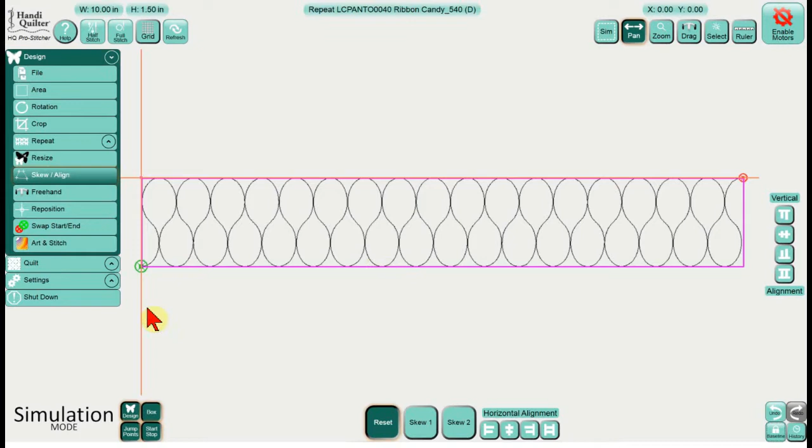So here's what I sent you, but you said you wanted more loops in the area, so let's just start from scratch. Let's close this file, nope I won't save that one, and I'll clear the area. Let me show you how I started. Here's just a pattern that I have. I'm not sure if it's exactly the same one that you had.

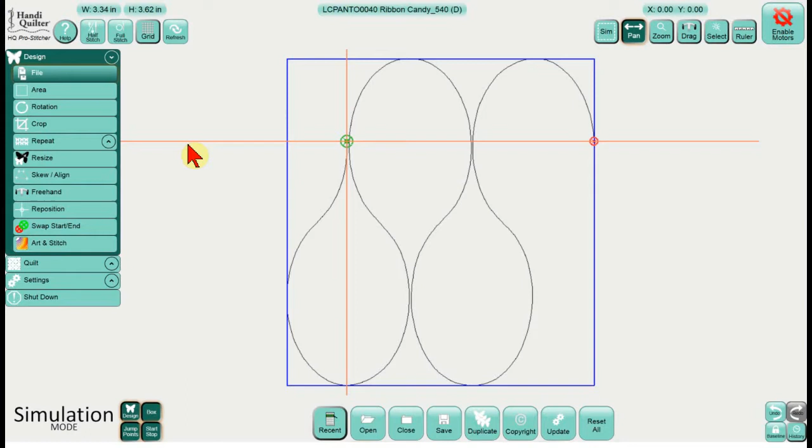The first thing I always do when I start is I want to create for myself a master in the size that I want, and then I'm going to skew it later at the quilt. You said you wanted this 1.5 inches tall, I believe it was, so I'm just going to resize it.

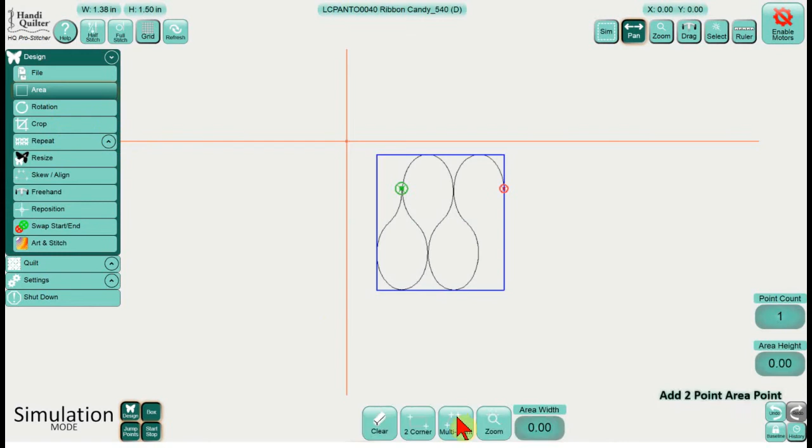Then you said you wanted it about 10 inches. The sash was 10 inches, but you wanted 20 of those loops to fit inside. So I'm just going to create an area, and I'll make it 10 by 1.5 inches tall.

Then I'm going to let Pro Stitcher do the work. I'm going to do repeat and fit to area, and I'm going to put it on point to point and refresh so that I can see. Now I'm just going to start repeating manually down here, and I'm going to depress my stretch to width button, and that's going to fit what I'm repeating inside of that area.

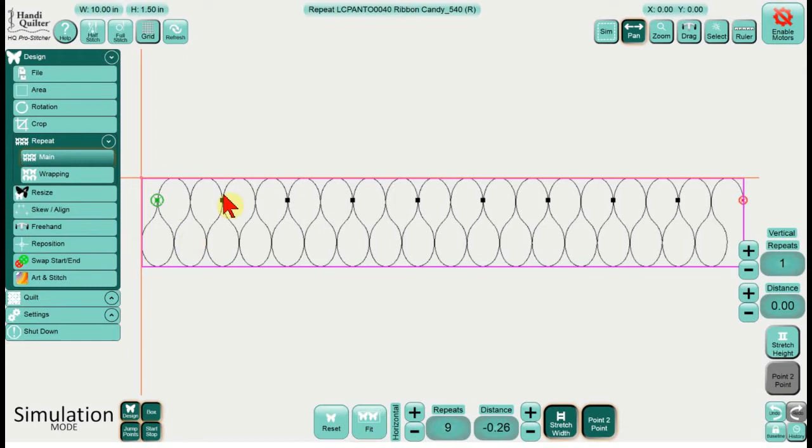Okay, we have 1 through 17. How about we put a couple more, or maybe even 3 more into that space? All right, that looks pretty good to me.

Now, the only thing I don't like, obviously, is the start and stop points in here. We're going to take care of that in a minute. And I also don't like how we have a little bit of unquilted space here and a little bit of unquilted space on the other side.

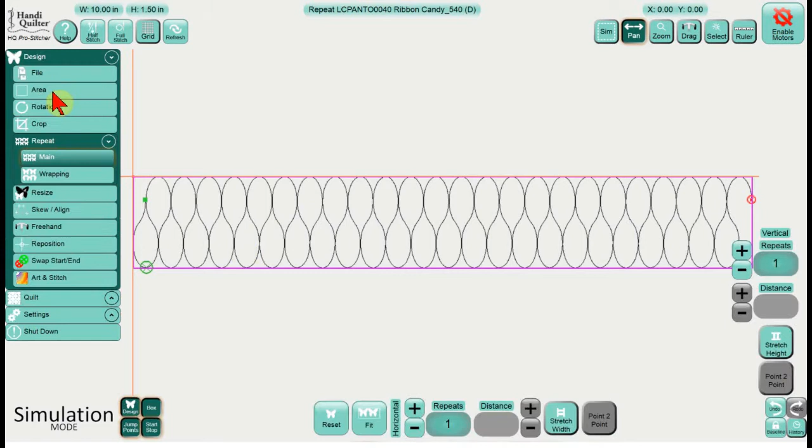So what I'm going to do is baseline, and then change my start and stop point by doing quilt, new start. I'm going to take that start point and advance it down until it's kind of on the bottom there. That looks good to me, and then I'll do a crop, start and end, and then baseline.

I'm going to do that with the other end too, with the stop point. So I'll go into quilt, new start and end, and move that end point until it's more towards the top there. Whoops, went a little too far. All right, and then I'm going to do the design, crop, start and end. Now that looks better to me as far as where the pattern's going to start and stop.

I'm going to go back to my align function. Once again, I'm going to depress my stretch. Now I see that I have a pattern that's 1.5 by 10, and I've got 23 loops. So I went a little bit further than you wanted, but if that looks good to me, what I would do is baseline.

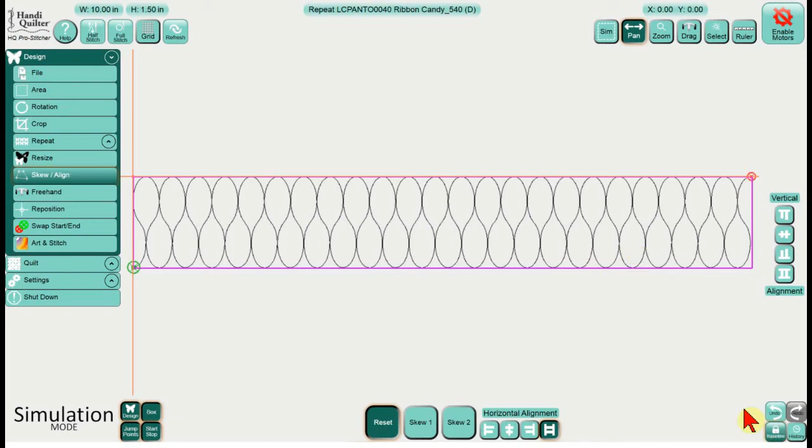I'm going to save it, and maybe I would call it my master sash. This is the one that I'm going to use when I get over at my quilt.

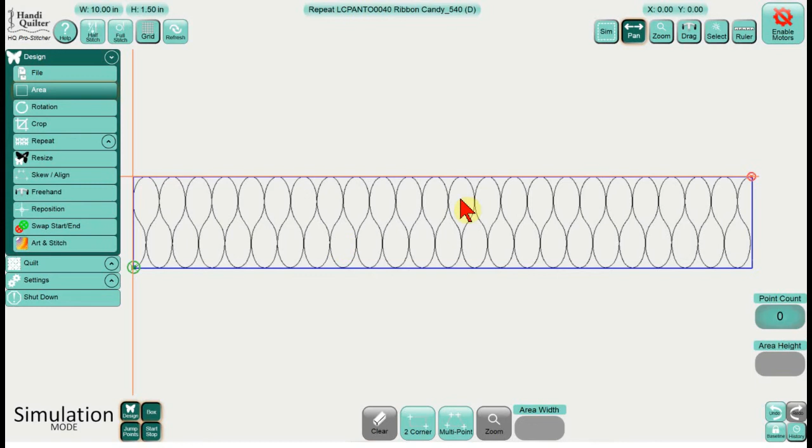Okay, so I'm working in simulation. When I get to my quilt, I'm just going to pull up this pattern. Let me just clear the area. So I'm going to pull up this pattern, and whether I'm stitching it horizontally or whether I'm stitching it vertically...

Now I can use full skew functionality actually at my quilt. I can just do that multi-point marking. I can skew that right in, and it will match every single sash perfectly, even though I only have one master sash that I'm using the whole time.